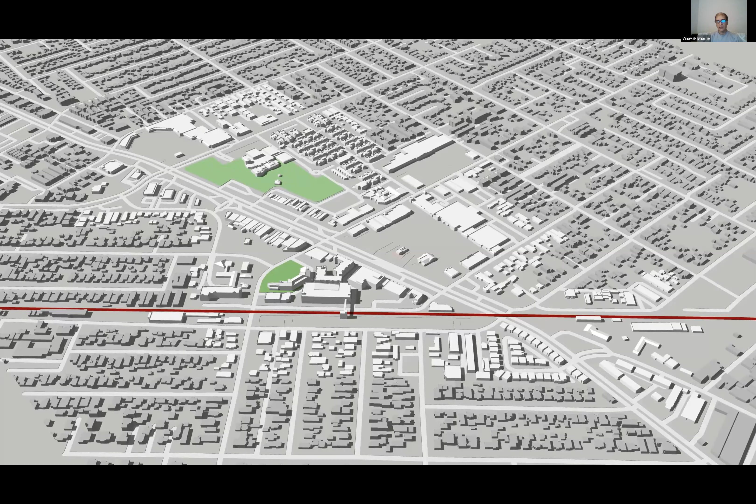As Kaiser said, when we first started reviewing the study area, we wanted to look at what was happening within our right-of-way so we could understand how mobility and development are occurring. We noticed a large portion of the right-of-way was allocated to parking, so we wanted to determine how many spaces and what the average occupancy of those parking areas are, so we can start to make decisions on how to rethink our streets and the overall design of our downtown area. We also wanted to look at both public and private parking to gain a sense of everything occurring within our study area, but we placed a larger emphasis on public parking.

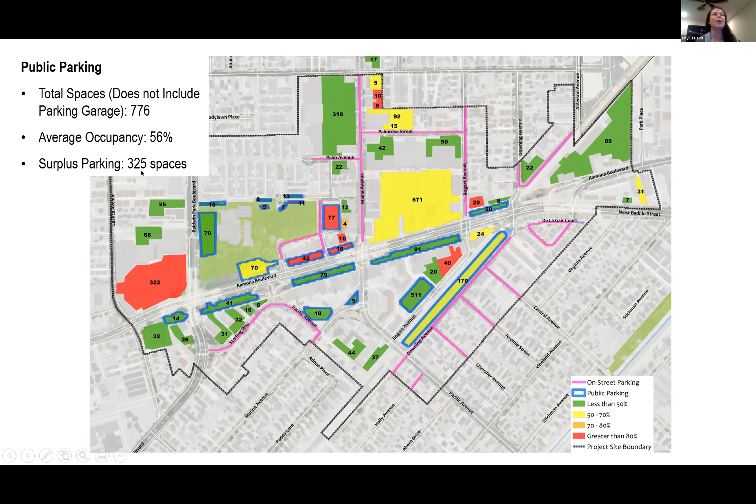Before I begin, I want to spell out the goals of this exercise today. In any planning exercise, there are three fundamental questions that emerge. The first: from a physical standpoint, what do we keep? There are always things in a place worthy of keeping; we don't need to touch or change them. They're resources, they're assets. All you have to do is embrace them, enhance them, and life becomes wonderful. The second question is what do you actually change, and by how much? And the third is what do you completely take away?

I think somewhere in this muddle of questions lies the answers to puzzles. And why I'm bringing this up is because in the focus group meeting we had some weeks ago, there were clearly talks about the importance of making your downtown a pedestrian destination. This isn't some kind of ideological whim on the part of the consultants, the city, the stakeholders, or the community. We all share the knowledge that making places for people to walk is a wonderful thing in so many ways.

It's wonderful economically because it generates a lot of revenue. Because of great placemaking, people come to these places, they enjoy hanging out, they want outdoor dining. In one of the meetings, there were comments made about the importance of outdoor dining and so forth. It's healthy in terms of allowing walkability and bringing in verdancy on the streets. Streets become a resource.

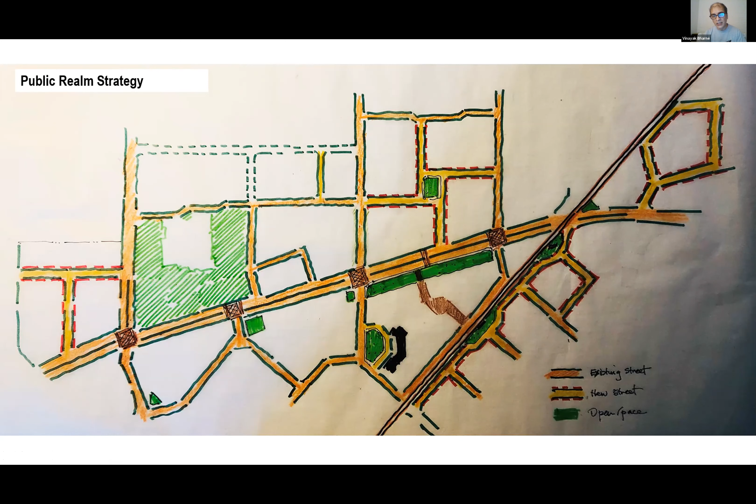We're going to study all of these over the coming days, but the fundamental idea is to recognize that the public realm armature—which we will be detailing in section, landscape, trees, and form—will be the principal catalyst the city can use as it begins to spawn the transformation of the downtown.

After you've done that, you begin to see another puzzle emerge: there are a number of wonderful existing buildings that deserve particular attention, and there are parcels that over time—over a 10, 15, or 20-year horizon, or perhaps never, it remains to be seen—may be places where private development transforms the downtown in different ways.

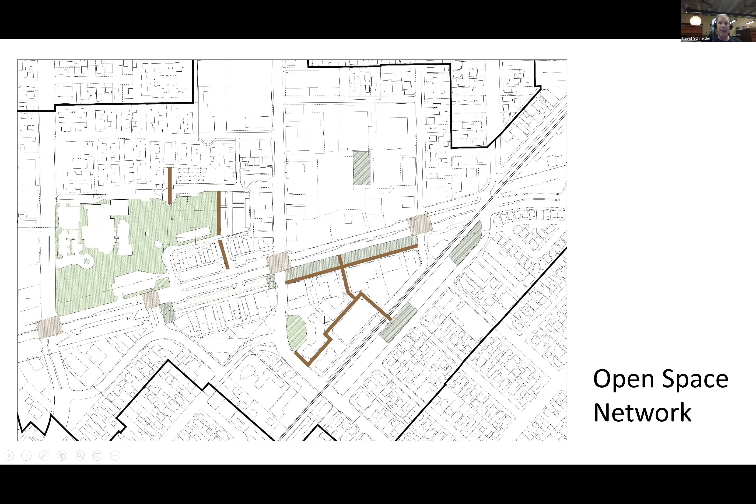So as we move across, we started to come up with what some of these things start to look like. So the first area that we looked at was the linear park. What would that linear park start to feel like and start to be?

So as you can see, this park now all of a sudden becomes this long linear space along the edge. There's opportunities along this whole edge for vehicles to come and be outdoor kitchens if there's not enough restaurants. It could also be used for marketplaces on weekends, farmers markets, various other elements.

This one is a much softer version. This is a harder version, but we have different opportunities as to what this space could be, and that's what we're going to start to look at.

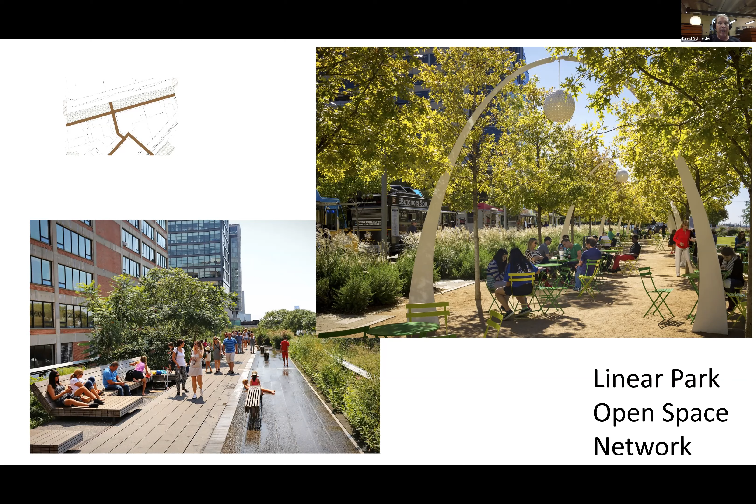Again, part of it, nighttime use is also an important element. So would nighttime lighting, monumental lighting or entertainment lighting occur along in this park to add a lot of nighttime effects to the Ramona, to get people to stop and maybe come in and stop at Baldwin Park?

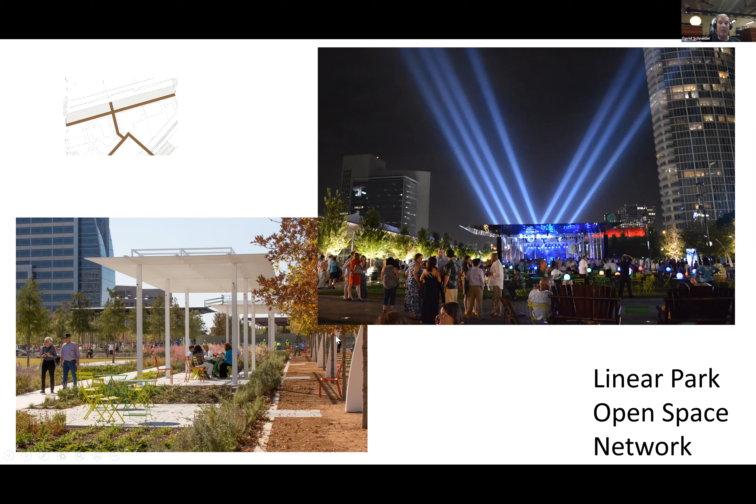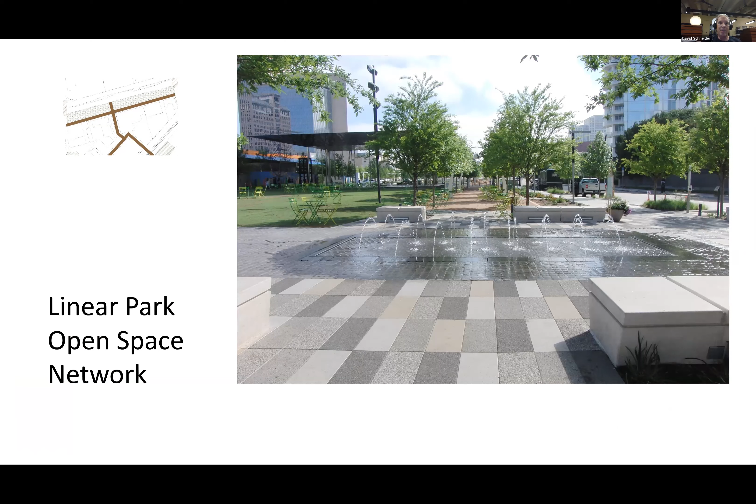And also we have opportunities not only for built environment within this, but those also could be simple shade canopies and various other elements. We also in the linear park, maybe at the entrances of Ramona at Maine, there might be introductions of small water elements that could add accents along that side. All of these things are looking to draw people in and get them to move throughout the area.

And also we looked at one of the options for the linear park in this particular area next to Bogart, where it starts to return back to Ramona. What would happen if these developments started to encroach beyond that park as their development? Because we felt that these developments here are really relatively new and they probably aren't going to change in the near future, but these could change at some point in time.

And this is just a possibility if you decided that you didn't want to have the linear park continue this distance. You might look at doing something such as this, where you have sidewalk cafes, a little narrower hardscape area, and buildings coming right up to the edge.

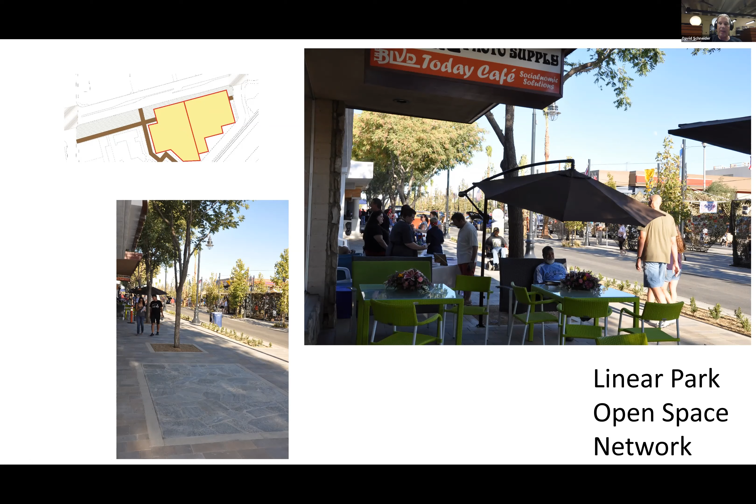And then we started to look at the spine that takes you from the train station all the way to Ramona and also to City Hall. And what could that start to be? You have a really wonderful captive audience of people on the train coming through on a regular basis. And so we didn't want to turn our backs to them. We wanted to be able to show how vibrant a community Baldwin Park is.

And so we thought that by allowing festive lights, outdoor dining, things of that nature, by allowing pop-up buildings just made out of containers along the parking lots, those are all ways of being able to make this look really festive and interesting for the audience, to maybe get them to stop their train early and come into Baldwin Park.

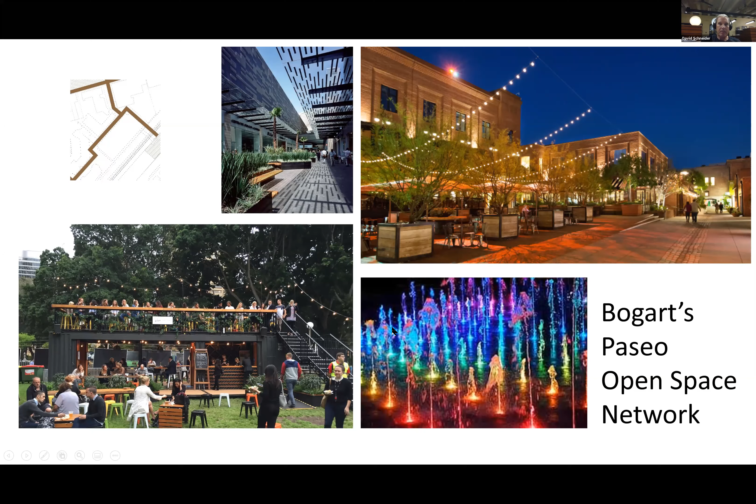And then also introductions of murals, outdoor lighting that can happen on the building. You have a couple really large canvases of the parking structure, as well as the ARC building right here that could actually display some form of art elements in the way of lights or murals, those type of elements that can again be seen by the trains to get people to want to stop and get off.

And then as you move through, we would want to create little spaces and plazas within this walkway to create places such as in this photograph where you have gatherings and people coming through. So again, it's a festive space.

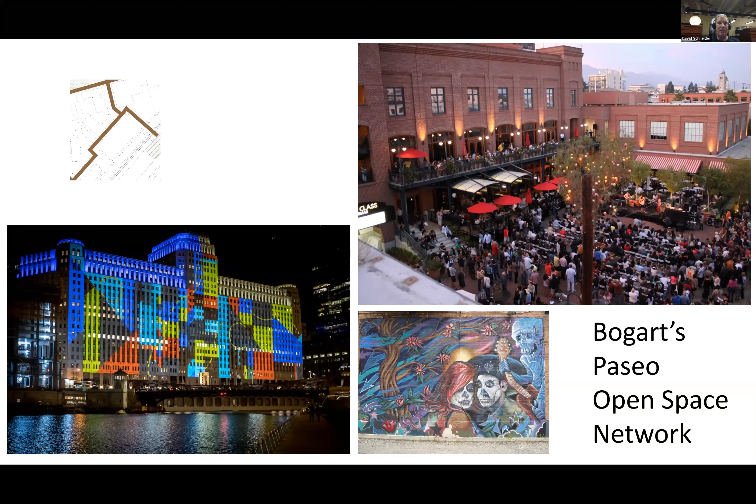And then you have the Paseo network. So we have a Paseo on the north side that cuts through the retail that could connect to Morgan Park along that edge. And what do those elements start to look like? Because those are, again, all really important elements.

We think shade is a really important element within Baldwin Park to get people to move through the space. And so we're starting to look at elements of that nature to get people to move through the entire area.

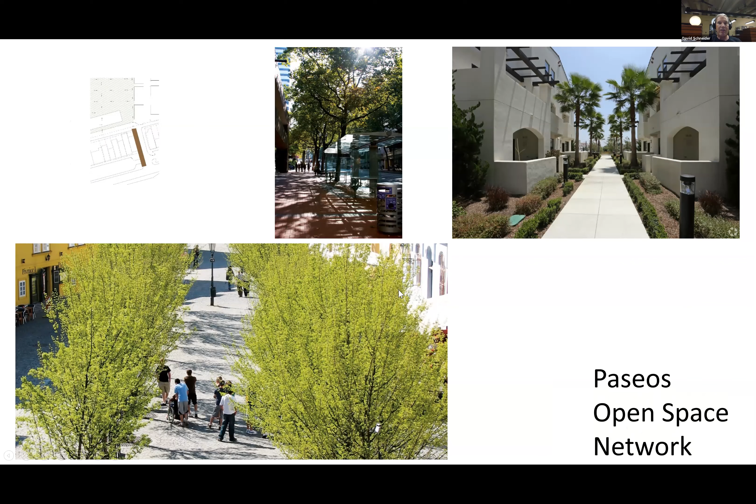And then we looked at the train station as another possibility of a park. We would also want that park to be a mobility hub. It would have a lot of other forms of transportation that people could take to get from the train station through Baldwin Park.

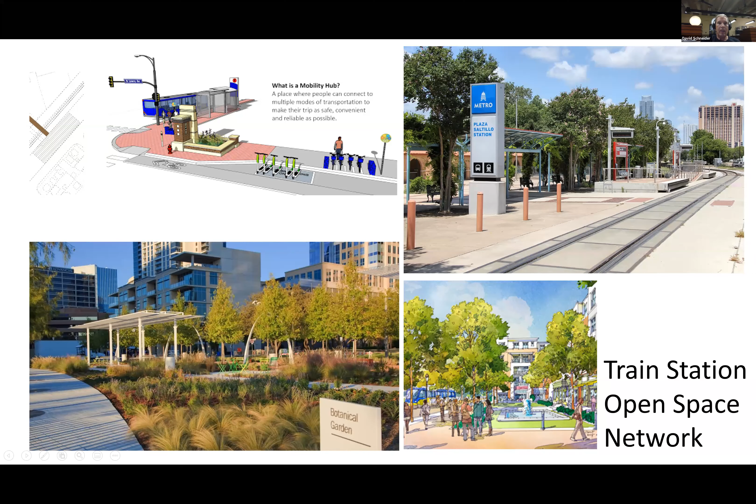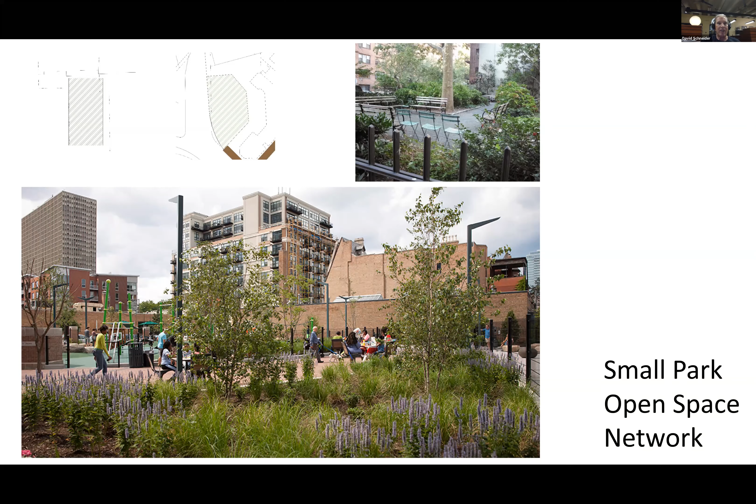And in the civic park, you might have a speaker's corner or a place for people to gather and have presentations for the city — various elements such as that for communications and presentations. And then we got into our whole network of streets.

How are our streets going to start to look and how are they going to feel? And we want to introduce bicycle paths, because it's not just about walking, it's also about being able to go through the entire area on different modes of transportation. Bicycling is important, so we're looking at trying to have protected bicycle lanes along the side areas.

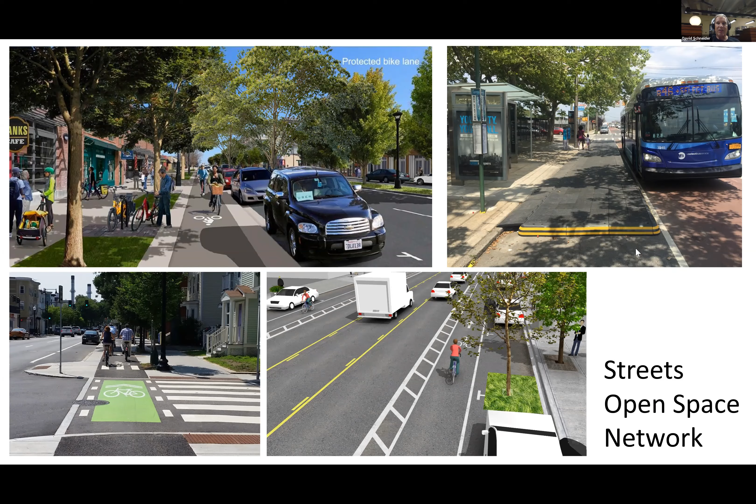And then how do we start to utilize some of our spaces that we have now, before this long-term plan starts to happen? We have lots of parking lots and various elements that can be reused, and they could be interim.

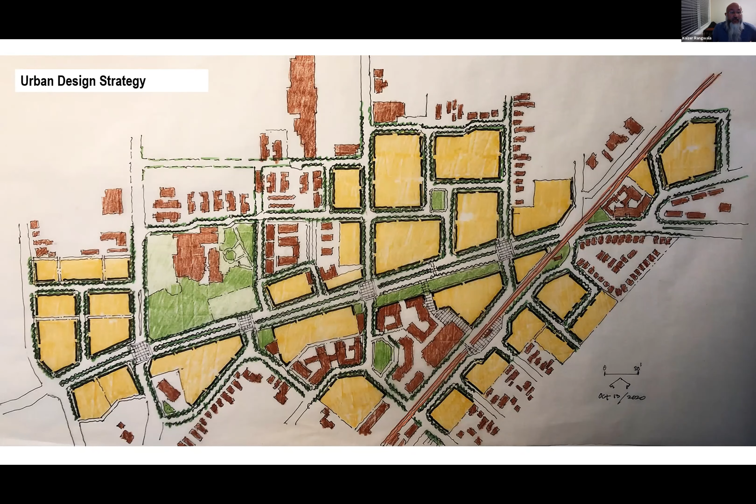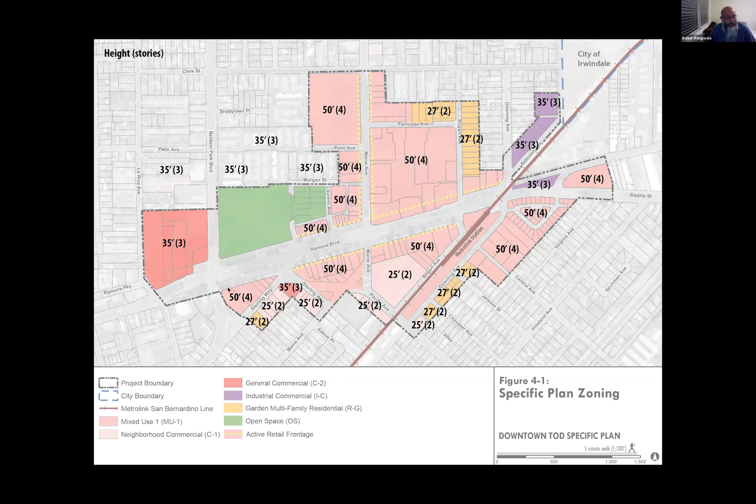Ron, working with developers for the past 4 years, you've experienced some comments and feedback, and Michael interviewed developers who mentioned the challenges of building under the current code. So we want to look at those provisions and make them more friendly for the market, while also more contextual for the neighborhood, protecting neighborhoods better than the existing specific plan does. Ron, I'll pass it on to you.

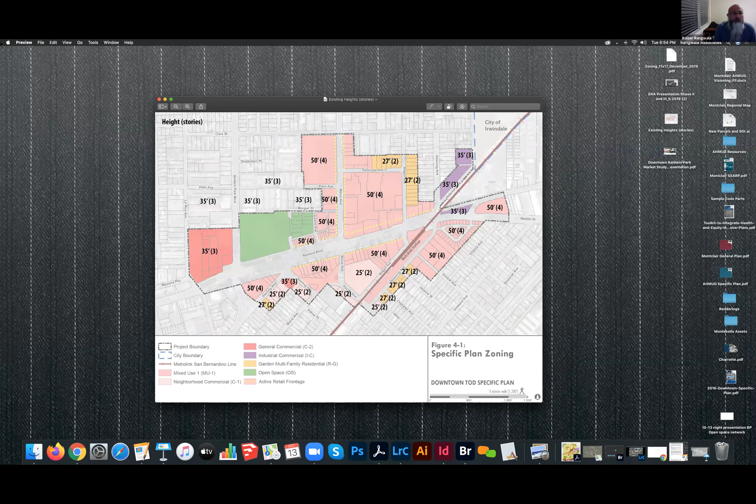Perfect, thank you Kaizer. Just one more stab at it - good point on the existing heights within the existing specific plan. With this new update, essentially being a living, breathing document, it acclimates with time. So I just wanted to clear that up.

I think the same person had a follow-up also - I was just about to ask if the current underutilized parking can be surplus for future development or open space areas, but David discussed that and it could be an option.

David, you want to talk about the unutilized parking? Well, my understanding is, through the mobility groups and everyone's recommendations, that many of the underutilized parking spaces we have right now would eventually become some form of future development, wherever they happen to be located. If they're on the southern side, they might be a park; on the southwestern side, they may be future development. So all we were doing was looking at possibilities of activating those spaces as options in the meantime until that development starts to come.